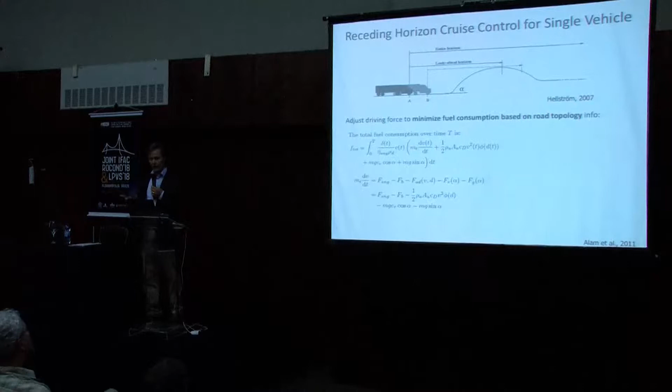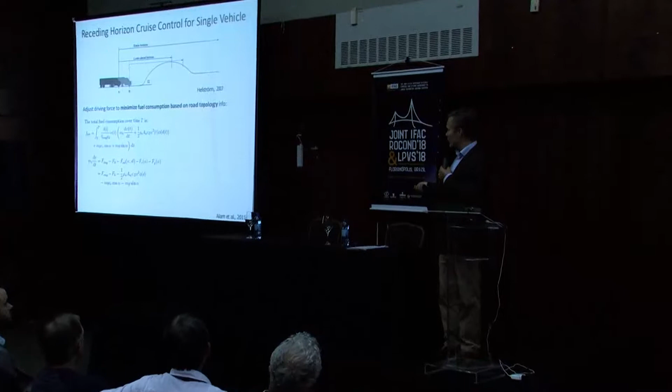And then we have two other parts which depend on the road grade. The interesting thing here is the second part, where you see it depends on the gravity and the road grade. So what makes this problem interesting is that for a truck, if we're going on a flat road, the dominating term acting against us will be the air drag. But if we're going uphill, suddenly the gravity is the main part. So we get an optimal control problem where there is a shift, so to say, between these two terms.

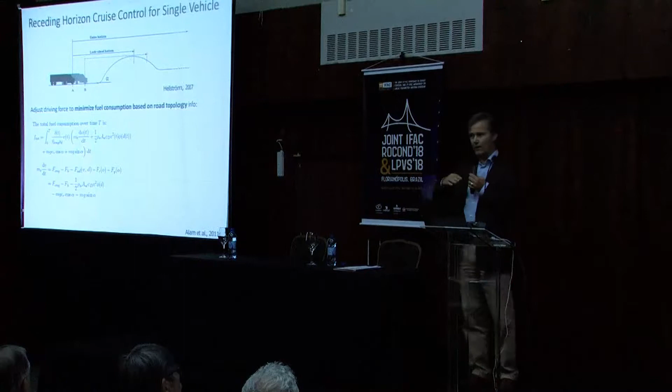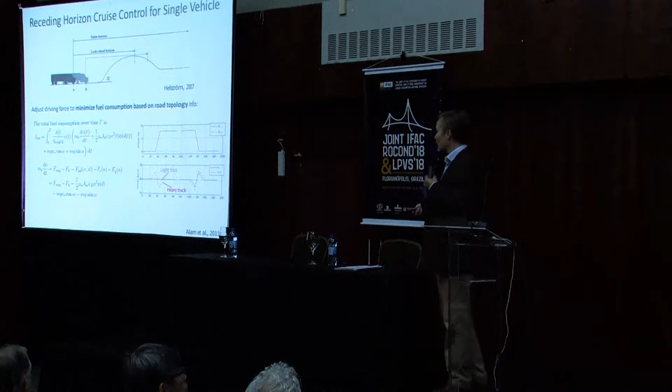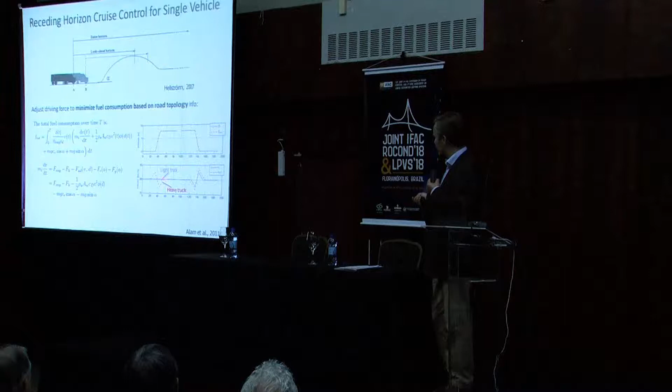So if we now take our favorite methods and solve this, we get solutions which are very reasonable. I illustrate them here. You see a hill going up and going down. If we have a heavy truck, like the red one, you see that the optimal thing is to speed up a little bit before the hill, and then let the velocity go down, and vice versa before the downhill. So it's very intuitive, but of course now we can calculate this automatically. And this is what is implemented today.

So typically the cruise controllers do something like this. And it's not very complicated to implement, right? It's just like an outer loop setting the desired velocity. This is how it's implemented.

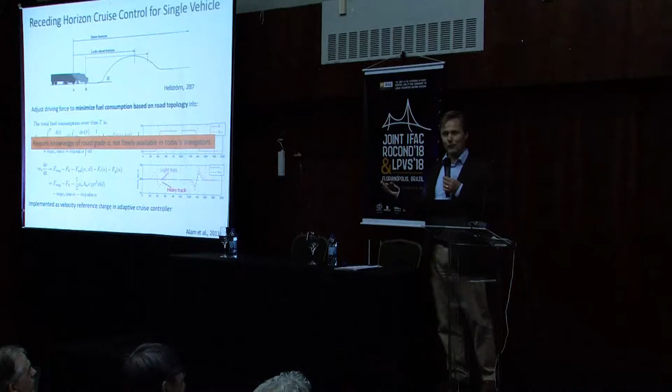The challenge, if you would like to do this in your own car, is that you probably cannot, for one simple reason: you don't have information about alpha. You don't know the road grade. Google Maps or Apple Maps or whatever you use don't tell you that, because you don't get that information out of the satellite data. The simple reason is that the Earth is flat, as you all know, from the viewpoint of the satellite. So you don't get good information about the altitude.

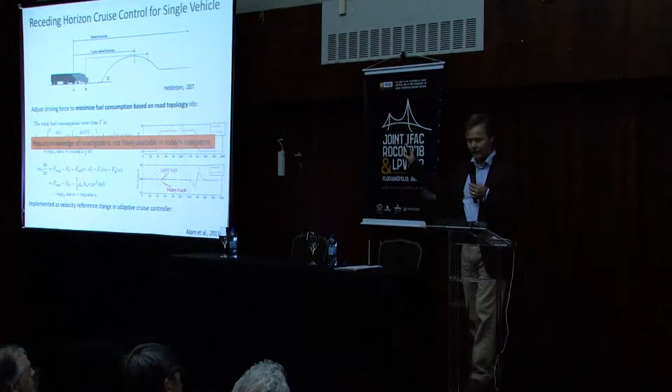So what do you do instead? You can do like Google and others do: you travel around the world with cars and measure this, and then you sell it. They don't sell it to us, they sell it to the big automotive companies and so on. But I won't dig into that more. In the future, I'm sure it will be available to all of us.

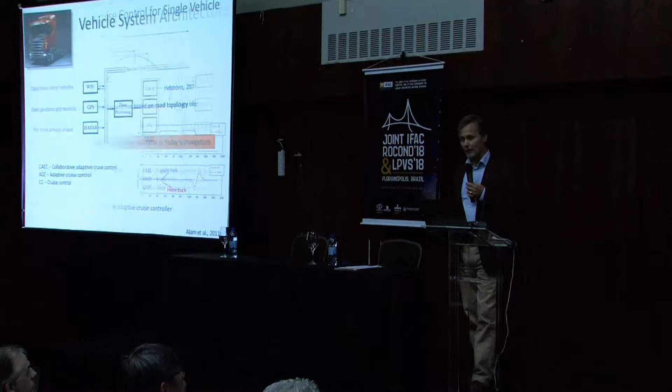Okay, so this was the cruise controller and how we can optimize it. If we look at the control architecture inside the vehicle, what does it look like? On the left side you have the sensors, in the middle the controllers, and on the right side the actuators. Sensor information is information from other vehicles, GPS, and so on.

Here I have the different cruise controllers. And what I activate is, of course, I set the reference speed to the engine management system, but I also need to regulate braking and gear shift. So I have three different types of actuators here.

I put this picture up just to indicate one thing when we start talking about platooning. When I develop my platooning controller, sometimes called CACC, Collaborative Adaptive Cruise Control, there's no change to the architecture or really the system. It's just another piece of code that sits here, and the driver is in charge. The driver could decide to switch it on or not. So from an implementation viewpoint, this is very nice, because it doesn't change much in the overall system. It's not like changing everything on the highway and so on.

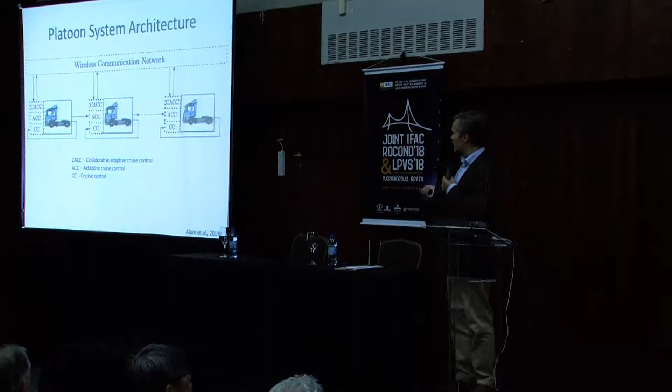When we have this in place in one vehicle, we go to many vehicles and have a whole platoon. Information between vehicles is basically communicated in two different ways: you have radar in front of the vehicles, which measures the distance to the vehicle ahead, and you have communication between the vehicles. The communication typically today uses Wi-Fi, 802.11p, a different variation than you have in your laptop.

It works terribly, but anyhow, that's what has been standardized and is being used in tests and so on. I hope it will be different in the future. I hope more control people will be involved in deciding how this type of protocol has to work, because we are closing the loop here. We are forming a network control system, which is different than just broadcasting alarm signals or so. Okay, so this is basically how the platoon system works.

Let's go a little bit into control now. Let me talk about that fundamental problem: how should we regulate the distance between the vehicles in these platoons? That problem has been studied for more than 50 years. Of course, we want to do this distributed, because the platoon might be long, so you only want to use local information for this.

Many of us involved in this know the notion of string stability, which is famous, introduced by Hedrick and many others. It basically means that if you have a disturbance happening for the first vehicle, that disturbance could propagate and even grow as we go along the platoon. So we can get phenomena like you see here, which is very bad. That problem has been studied for a long time.

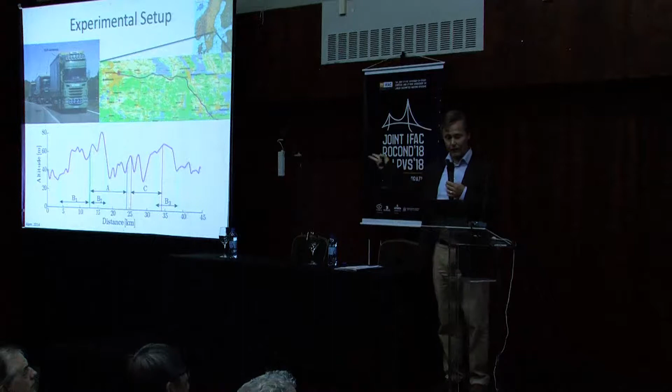Let's look at how such a system works in experiments. These are experiments we did a few years back with a distributed controller, very similar to what is in the literature, regulating a platoon of 3 vehicles. We went out on a highway west of Stockholm, 45 kilometers, going back and forth, for 3 weeks, with professional drivers of course—I don't even have a truck driver license. But anyhow, we were collecting information. So how did this work?

When my student at the time, Assad Alam, came back from this experiment, he was terrified. He collected all the data and summed up all the fuel savings that the platooning vehicles made, and he got a negative number out. This was just a few months before he was supposed to defend his PhD thesis, and he said, I cannot defend my thesis—I've shown that platooning consumed more energy than it saved.

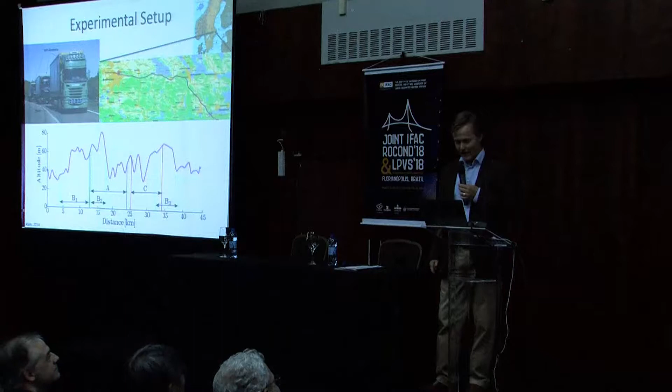The advisor came with very good advice and said, let's wait a second. Let's look at the data first before we just sum everything up. And we did that. I will give you a snapshot of what can happen here.

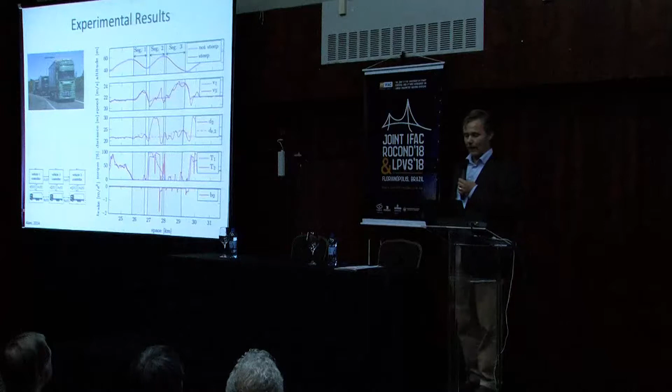Let's look at a short segment—just a few kilometers of that road. On top here, we have the road altitude going up and down. Here is the velocity of the first and second vehicle of the platoon, the distance between them, the torque generated by the engines of the first and second vehicle, and the braking of the second vehicle.

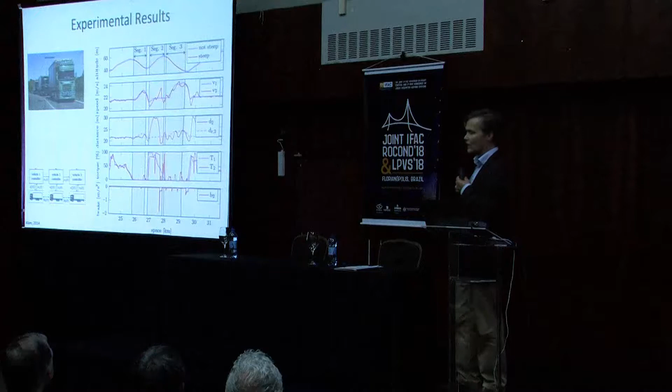You see here, if you look at how the first vehicle, the blue one, is acting—reasonable, right? We are going downhill here, and the speed of the first vehicle goes up, and then it goes down here, and so on. But you don't have to be a professor in control to see that this is a fairly bad control system.

If you look at the second downhill, for instance, you see that for the second vehicle, the velocity starts to oscillate, and the distance between the vehicles starts to oscillate. And the worst thing, if we want to save fuel, happens in the bottom plot—you see that we have to brake, not to run into the vehicle ahead. And if we are braking, we are just wasting that energy. So this is bad.

So, if you wonder what happened with this student—when we removed the segments where his system didn't act well, the results were pretty fine. There was a saving of 7-8% or so in general, and he graduated, and he's now head of a department at Scania, and happy about it.

But after we had this result, we started to think about whether there was something fundamentally wrong. Was it just a tuning issue with these controllers, or is there something fundamentally problematic if we think about regulating the platoon in this way, with only a distributed controller in this classical type of approach?

We thought there might be two things at play here. One is topography variation—could it be that all the theory, and also the few experiments done in Nevada and similar places where you don't see that many hills compared to Sweden, missed something? So this was one thing: how does topography variation influence us?

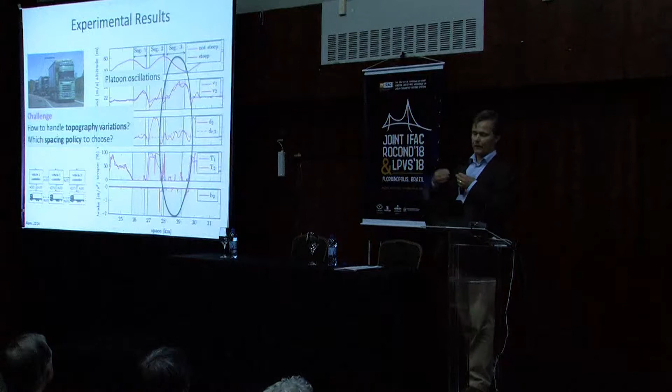The other thing was, how should we regulate the spacing? Typically you regulate the distance between vehicles, but is there some other way of thinking about that? Together with Bart Besselink, who is an assistant professor now in Groningen but was a postdoc with me, we came up with the following idea, or way of seeing the problem.

Let's start with a cartoon before we get into some mathematics. Say I have a vehicle here, a truck, that drives on a flat road and then starts going uphill. The velocity is necessarily going to get a disturbance at this point, because we never know exactly where that point is.

So if we plot the velocity of this truck over time, we get something like a dip. And we can plot the same thing over space along the road, and we get a similar dip. The next thing we do is put a platoon there, and now regulate the distance, d, between the vehicles.

Let's say we have perfect controllers, so we're able to regulate them exactly to d. What happens if we run the same thing again in our heads? The first thing that happens is this vehicle has a disturbance, as I said. At that time, since the regulation of this distance and this distance is perfect, that disturbance is going to instantaneously propagate to these two vehicles.

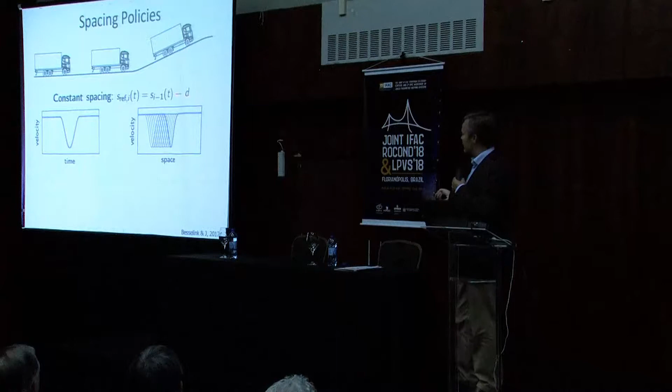So in time, we get the same disturbance happening instantaneously. If we do it in space, they are not at the same point in space, because these vehicles are here and here, so it will look like this. That's if we regulate on distance. We can now regulate on something else, something called headway, for instance, and we get different plots. We can also try to regulate on the time gap.

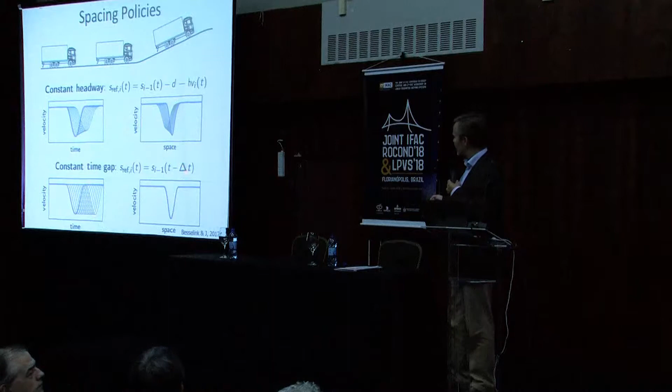Imagine we regulate on a variable I call delta t, which I can now try to dynamically set so that I get the completely opposite of the previous picture. What I can do is make sure delta t is such that in space, this disturbance is happening at exactly the same time. In that way, I avoid this propagation. I should have said that already.

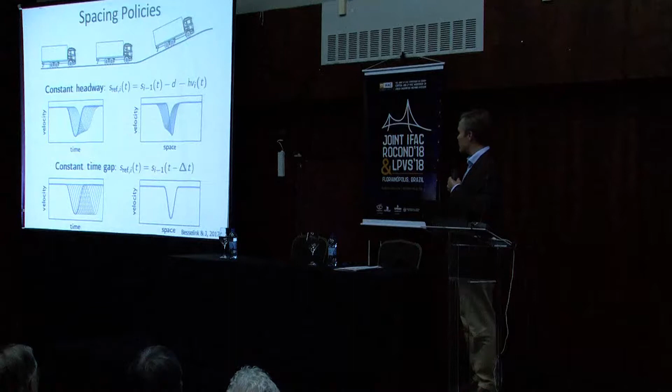Of course, next in time, this vehicle is going to be exposed to the same disturbance, and then this vehicle is going to be exposed to the same disturbance. So with this way of regulating it, I get a sequence of disturbances entering the platoon, and that's creating some of the problems you saw previously. This is not happening if we're now regulating on time in this way.

Is there some other consequence of that? Yes, the very nice thing from the control architecture viewpoint is that if you think about it, regulating on a time gap like this, making sure the distance between vehicles is just shifted in time, is equivalent to saying that the velocity for each vehicle should be the same in space. S here is the space variable.

So what does it mean? It means that if I give a velocity reference in space, all the vehicles in the platoon should just follow that as they go along the road. I can write this out and say my control objective splits into two objectives: each vehicle should stay with that reference velocity in space, and I should try to regulate the time gap between the vehicles. So a control architecture that looks something like you see in this picture.

We can also reason this is a good way to do it, for instance formulated in the framework of string stability. So we introduce something called disturbance string stability, which means we have a number of dynamical systems in a sequence like this. I call them xi, the state of each vehicle, and each vehicle depends on the state of the vehicle ahead of it and itself. Then I've added another variable, the disturbance variable.

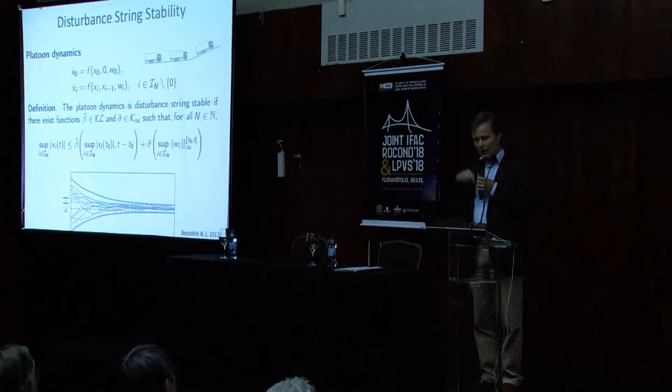And the first thing, of course, this is now a notion which I need the whole string of n vehicles to capture, right? I have to check all the vehicles. So can I go from this notion, checking all, to coming down to checking locally? And the answer is yes.

And this is what this theorem says here. So it's actually enough that if I check the state of each vehicle, here xi, and I compare that to the vehicle ahead and its own disturbance. So if I can bound that in such a way, then the whole system will be stable.

So the next question for us as control engineers is, of course, then can I find controllers that could do this? And you can probably find many different types of controllers that fulfill this. I will just show one that we developed here.

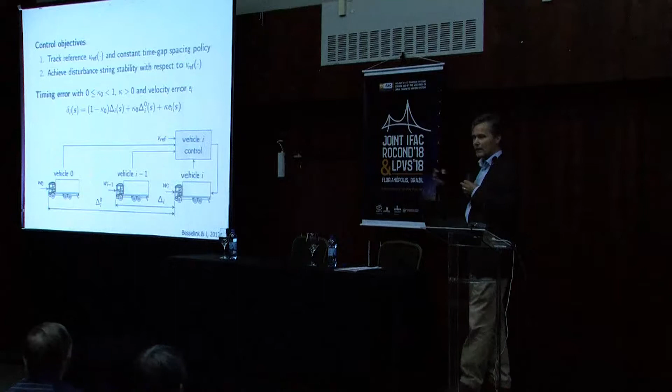So what we did was we introduced a variable which I call small delta, that captures both how well I'm regulating the distance to the vehicle, as well as how well I am close to the velocity reference. So if I'm able to make this small now, I would be able to capture these two quantities there.

And the nice thing now is that this actually works. So if I regulate this delta in each vehicle, so I'm regulating on this quantity, I will then be able to make the system stable in that sense that I introduce, given that this quantity will be kept small.

And notice that this is not, I'm sorry it says decentralized control - it's not really decentralized or completely distributed, right? I utilize some global information, and we know that this problem can probably not be solved without some notion of global state information.

But what is nice here is that it suggests that instead of sharing information and just arguing about how we share information on one graph, in this case a string, we have split this up into two layers and argue that certain information should actually be propagated in this direction also, not just in this direction. And if we translate that insight into the experiment I showed before, notice here.

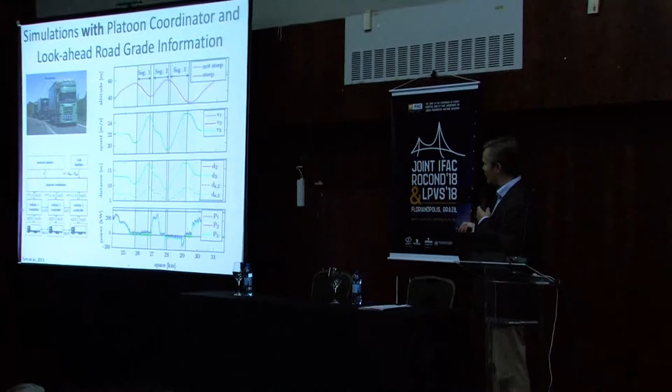If you look at the bottom left here in this architecture, you see that I have added some more blocks. In particular, in addition to the vehicle controller that resides in each vehicle and regulates the velocity of the vehicle, I have added something I call a platoon coordinator, a road database, and a mission planner here. So what is the essential here?

I have actually added two important things that change the control problem completely. I say that I have available road grade information, and that information comes from somewhere and feeds into that platoon coordinator. And then the platoon coordinator does exactly what you have seen on the previous slide.

So the platoon coordinator now computes reference velocity in space, and they should be the same, right? So they send it down to all the individual controllers. And then each of the controllers just regulates like you have seen previously.

And in this situation now, with the same data as previously, you see we are able to solve the problem fairly nicely, right? So in this case, all the vehicles should follow the same velocity trajectory. And you see they do that over space again, not over time, of course.

These are simulations. It's hi-fi simulations done at the automotive company Scania that we work with. So it's a very detailed simulation, but I want to emphasize the previous thing were real experiments. We are not yet able to run this in real experiments. Maybe next ROCOND or whatever, LPVS.

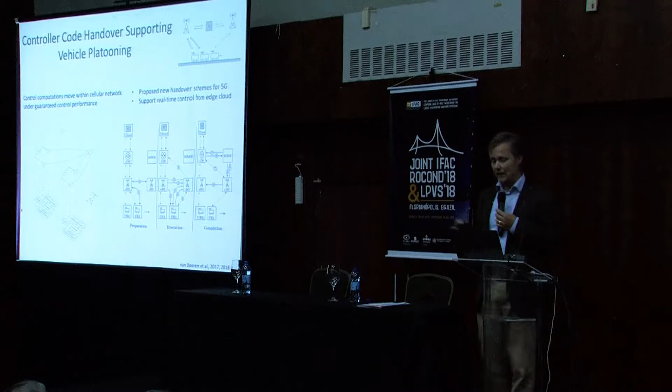This is somehow illustrated here. I won't go into more detail, but I think it's a fantastic possibility to think about future infrastructure-type control and what is required from the infrastructure to do real-time control of such systems.

Let's go on to the second piece here. They are not all equal in size and time, so don't worry, I'm not completely off. Let's go back to platooning and the platoon formation I talked about earlier.

What do I mean by platoon formation? I mean automatically having vehicles form platoons on highways. The principle is very simple: vehicles come from different sources, different roads onto the highway, and then merge on that highway.

The solution here is mathematically very similar to what you saw previously. You solve an optimal control problem and find a reference velocity that you suggest to the different platoons that are to merge. The control system is a little different now.

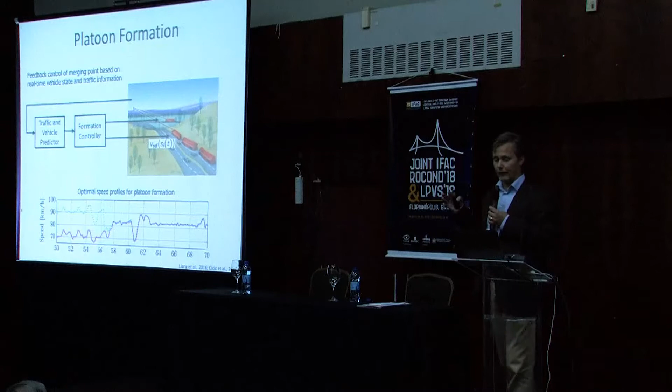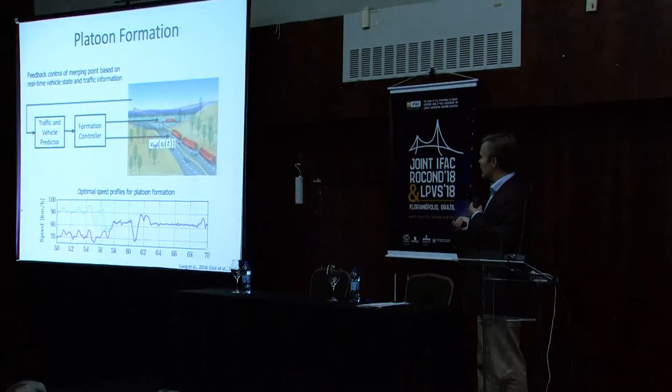Why? Because the information we get is not only from the vehicles, but we also need information about the traffic. That information goes into a predictor and then a controller that generates the control signals being communicated. I won't talk more about the details, but I'll show some experiments we've been doing on this.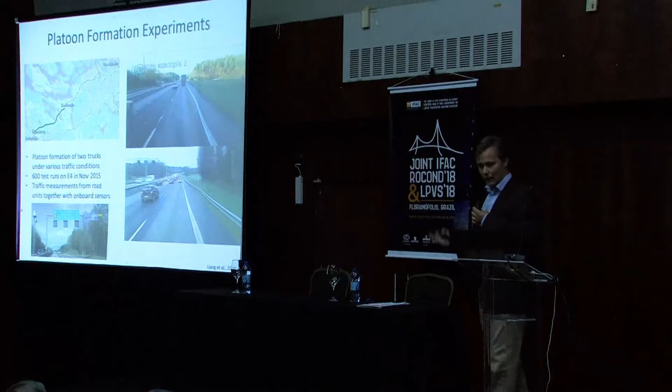So now we are back in Stockholm, on another highway than last time. We are going along a stretch about 10 kilometers south of Stockholm. On this highway you see now and then that we pass these gates.

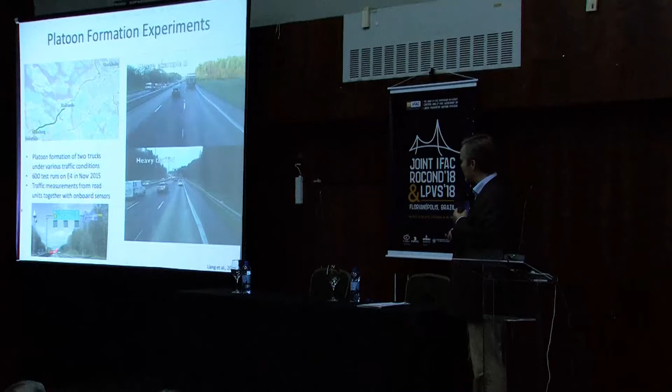There's one, in the picture down left. You see there's a gate here, and this gate measures the density and flow of vehicles in each lane. This information we can gather, and we did that.

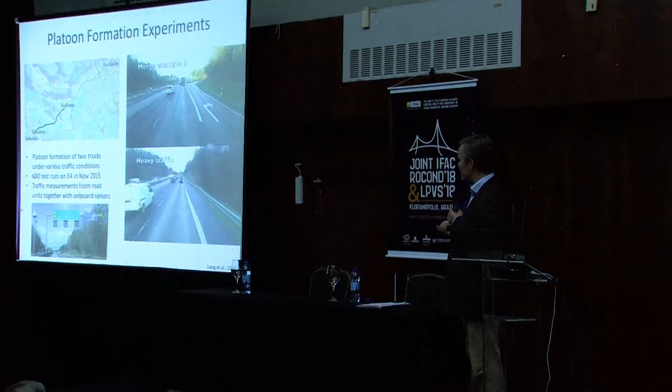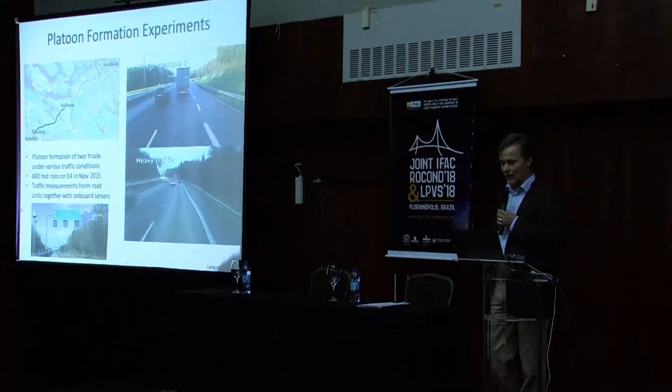What did we do here, what do you see in the videos? We are sitting in a second truck, trying to merge with the first truck. We did this over and over again for a few weeks, 600 tests - morning, no traffic, early 5 o'clock, during rush hour, and so on - just to see how this works and to understand what we can do about it.

One thing you can do once you've run these tests is take measurements from all the gates and plot them on what traffic theorists call the fundamental diagram - a relation on a highway between traffic density and flow. You see it has a fairly nice linear regime, which we know is typical.

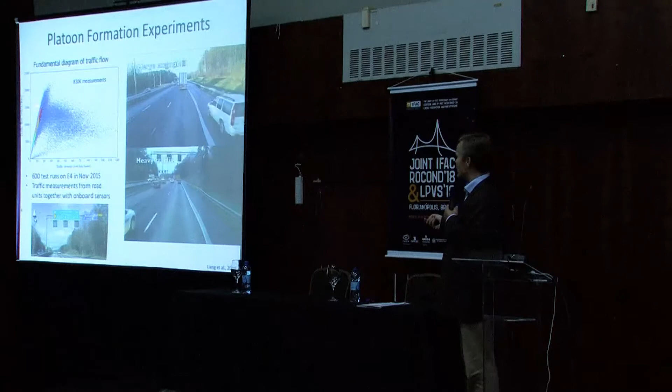If we have congestion, we would be all over in this diagram. But with this type of information, we can utilize it for predicting when we will be able to platoon among these vehicles. Perhaps in heavy traffic we will platoon or merge a little later than in light traffic. So you can use this information in real time to do this type of prediction.

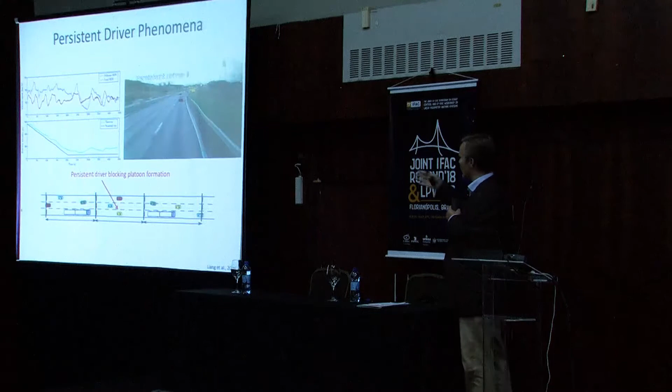You can also use this information and these videos to see interesting phenomena. What you see here happens now and then. There's a little red car there, and the driver of that red vehicle is not like all the other drivers. In Sweden, on the highway, cars go 110 kilometers per hour while trucks go 85. So this guy is not supposed to stay there, he's supposed to pass. And if he stays, we cannot merge, we cannot form the platoon. This happens now and then. We call it the persistent driver phenomena.

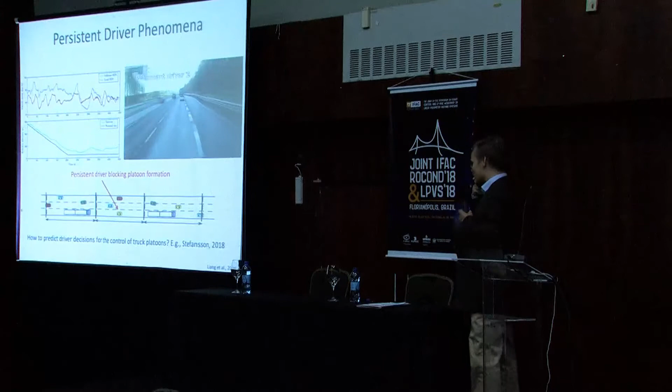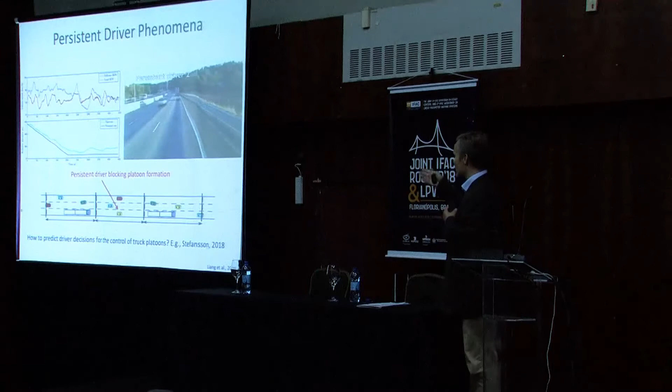I think it's interesting enough, and since we talk sometimes about cyber-physical human systems, we've actually been using that as an example to develop some models, and we also started working with some neuro clinic people to try to understand human behavior in various types of situations like this one. You can say, how should you be able to predict humans?

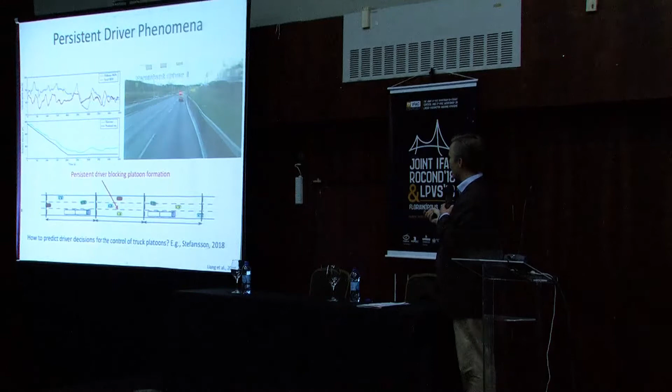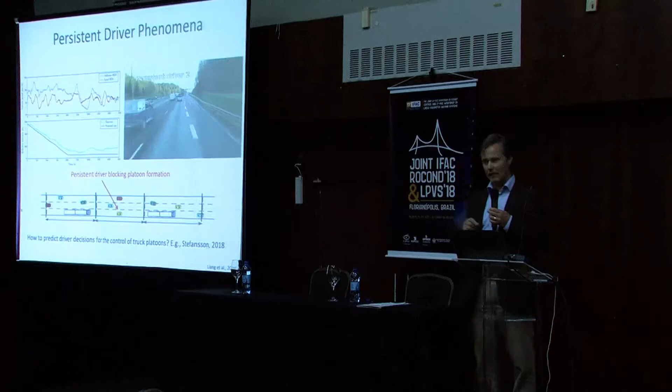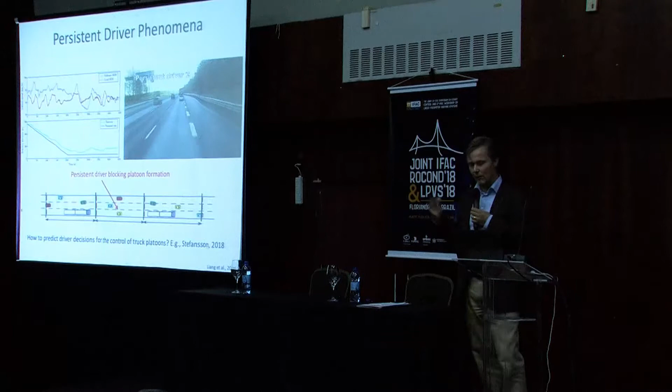But notice that in this situation there is a very tight interaction between the human and the traffic. What happens here is there is a heavy flow of vehicles. If there is no flow of vehicles, you would imagine that if the density is sufficiently low, probably that driver would make another decision than staying. So there is an interaction between the physical state of the system and what the human decides to do. I think there are things that maybe one could improve in how these systems work today.

Let's go to something else. Another thing we started recently to get interested in is how does truck platooning influence traffic? I talked about wanting to do platooning because it benefits the trucks. But could we also say something about what the influence would be? Yes, we can do some of that, and I don't have time to go into much detail.

As an electrical engineer, you could think there is a filtering going on here. The trucks are going slower, they don't change their velocity very much. It's a bit like a low-pass filter into traffic, which might vary much more, and there we have these phantom waves and so on building up. So there could be something here, and this will give you an appetite on what one can do.

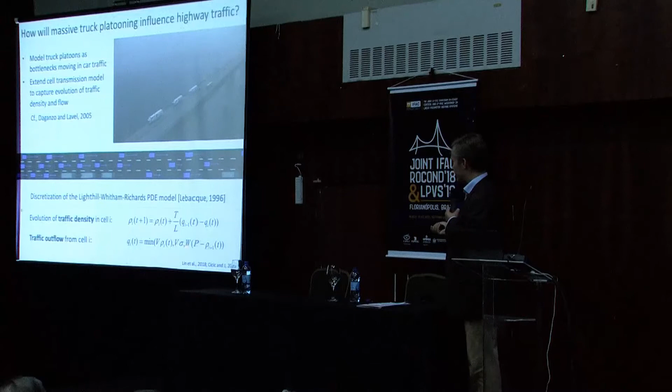One type of model one can develop here is based on classical traffic theory, where you try to model the density and flow of vehicles. There are different models here. One very famous model is the cell transmission model, developed by Daganzo back in the 90s and studied by many people. In this model, we can introduce the concepts of platoon and see how they influence traffic, giving you difference equations on how the density evolves.

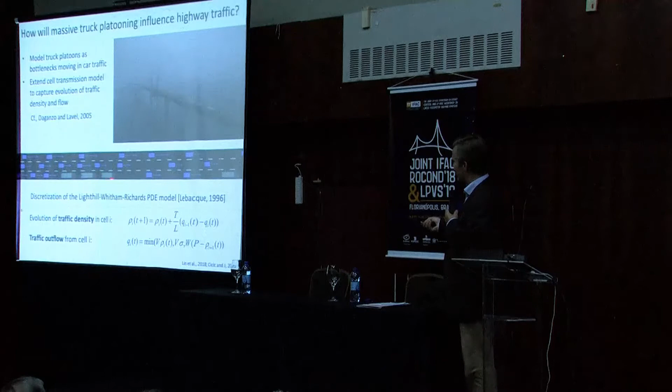Notice here that the platoon acts somehow like a bottleneck. If the platoon were standing still, the truck basically cuts off one lane, and there are only two lanes here, so the capacity of the highway reduces. But the trucks are not standing still, they are moving, so it's called a moving bottleneck. You have a dynamic phenomenon happening in the interaction between these two concepts.

Now one can think about controlling slightly the velocity of these platoons. That will affect the dynamic phenomena of the rest of the cars too. So you can control some components here.

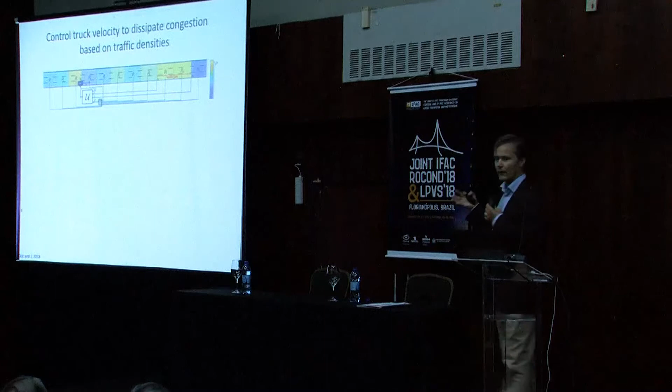So what could this look like in a picture? Basically, we have segments of a highway, and given the sensors I showed you before, we can know the density in these segments. The lighter color here means higher density. Imagine I could regulate one vehicle, or one platoon, here. Based on this information, I can try to improve the traffic congestion. Of course, I cannot solve it completely, because the congestion is there because the capacity is not high enough.

What we can see is things like you see in this plot. Here I have the road, the distance along the road, 0, 5, 10 kilometers, and time on the y-axis. The color here is a density, just like up here. So you see that at 10 kilometers, for instance, you see that I have different densities over time. I can now follow a single vehicle here, like the red one.

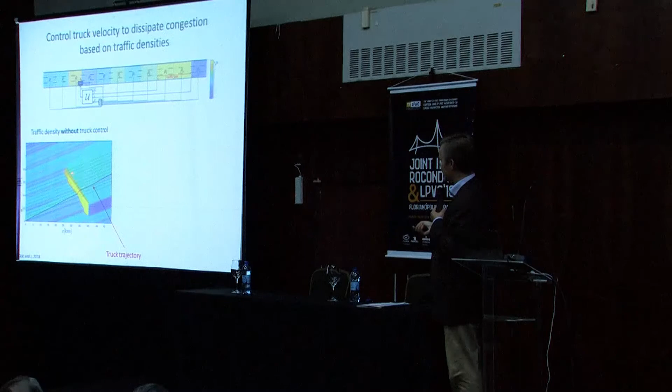I start here at 0, and then I follow more or less the flow that I have. And over here I have a congested area. The congestion started at lower time right here, and then it propagates forward in time but backward in space. So this is a very common phenomenon that you see in traffic, right?

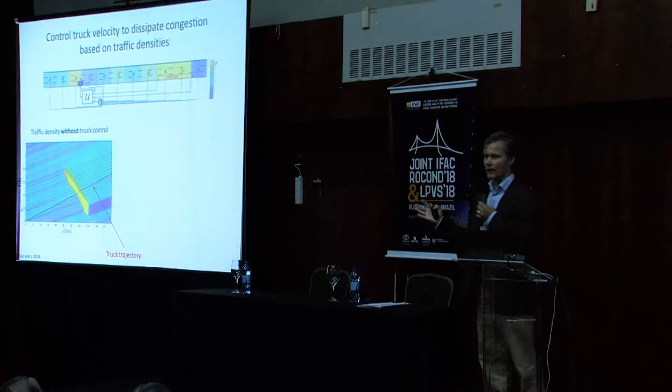So let's say that we can now control that vehicle or that platoon. What can I achieve then? Then I can achieve this. So now I let that vehicle go a little bit slower, you see here, that's why it has a higher derivative in this plot. What is the consequence? You see that this yellow area is gone now.

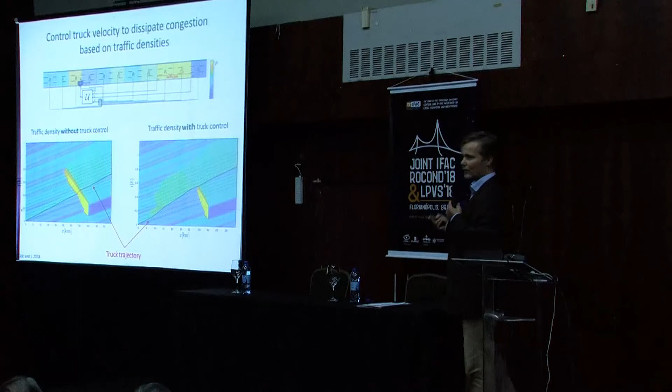But there is no free lunch, so what has happened instead? I have a little bit more congestion here instead. But from a traffic viewpoint, it might be better to get rid of the yellow area, where there is more or less a stop in the traffic, and drive a little bit slower before than having that. So this opened up this type of possibility to do this type of control, which I think is a very exciting control problem, and we are just at the very start of this problem.

I see that I'm starting to run out of time now, so I don't have much time to talk about the last layer here, but let me mention the problem that we have there. We call it the platoon matching problem. It's an optimization problem where, when we know where vehicles are going, we would like to match them as they go along here, so that they platoon as much as possible.

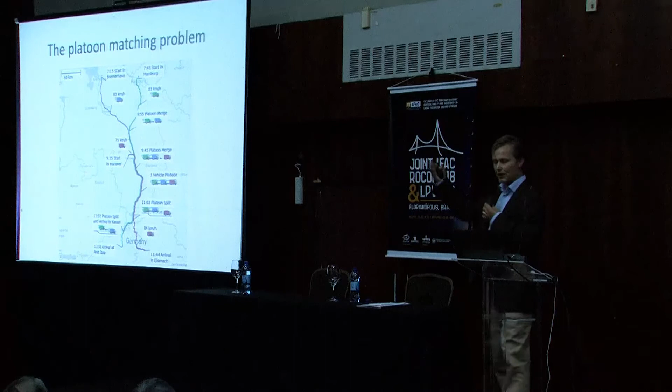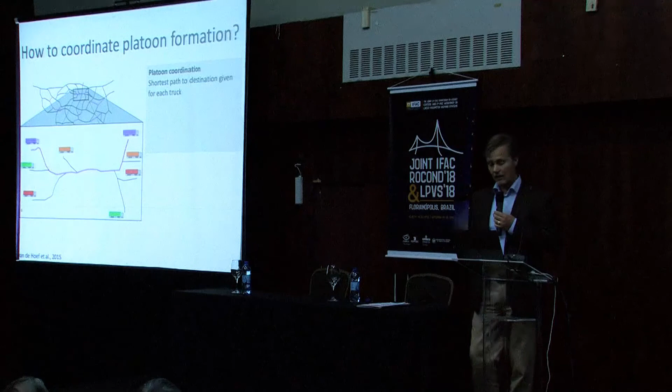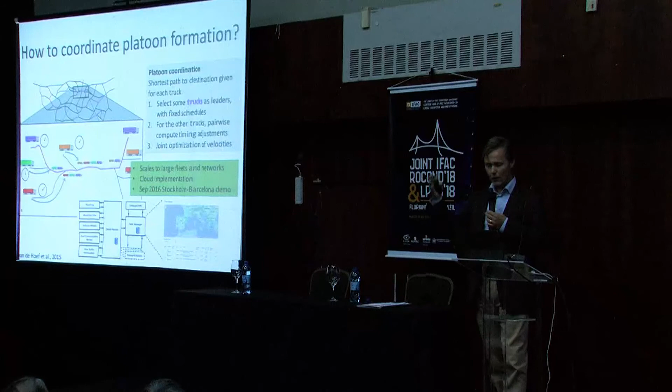This can be solved, for instance, locally by looking at individual vehicles, where they're intending to go because it's their shortest and most efficient route, and then we try to maximize the amount of platooning by changing the velocity a little bit or changing the departure time a little bit. This we have also implemented and done experimentally. We were running over Europe from Sweden to Spain with these vehicles and tested it and so on. There are nice mathematical problems here which are open.

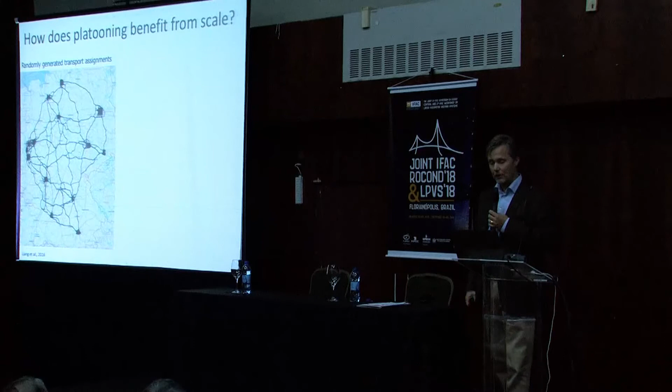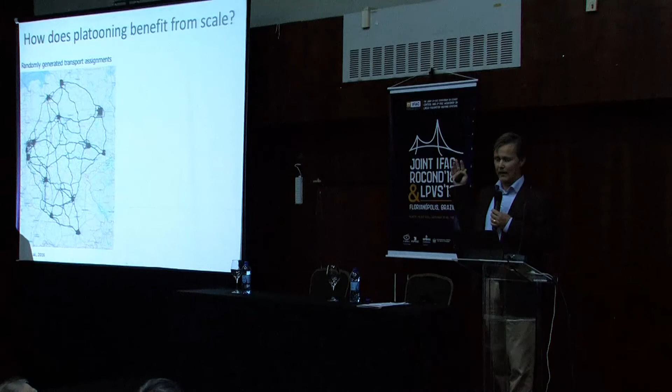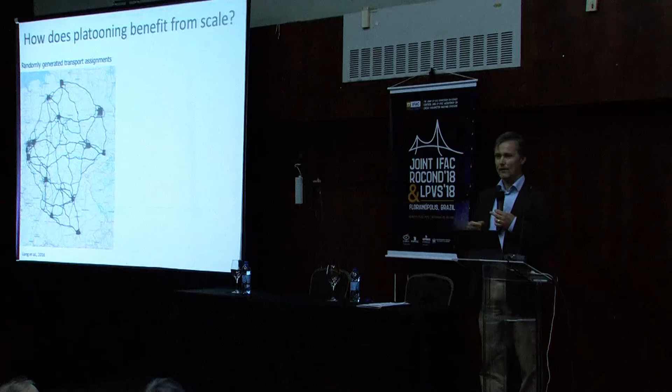If we ask ourselves how many of the vehicles need to have this technology in order for it to work, what does that have to do with mathematics? Think about that we have this graph again. Basically, if we are a vehicle there, we should be close to another vehicle so that we could speed up a little bit or slow down so that we could platoon. So how close and how many do we have to have there?

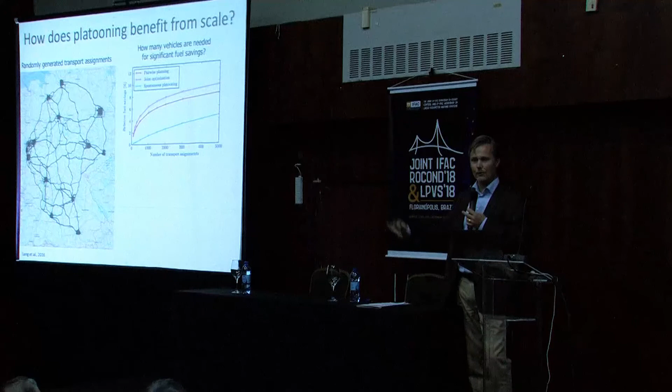Just to give you a number here, if we look over Germany again, it's actually enough to have just a few thousand vehicles in order to save up to this maximum 10-12% of fuel. If you remember my very beginning of the talk, I said that there were 400,000 vehicles in Germany, so it means that we only need a penetration rate of 1%. 1% of the vehicles need to have this in order for us to actually start saving quite a bit of fuel. So with that, I would like to draw some conclusions, just summarize.

I talked about this 3-layer control architecture and some problems that we have on the different layers, and I talked about this string stability, controlling these vehicles over the infrastructure.

I hope that the chairman allows me to take some questions. If you don't have any questions, I have 3 suggestions of questions there, which I didn't have time to talk about. One thing is, who should pay and what should you pay in this part? Should the driver who drives in the first vehicle get paid? Should there be a service that society provides, and so on?

There are many interesting questions. It's not just we who are doing this. We have just started a new project in Europe where all the European truck manufacturers are participating, where we want to do platooning now with vehicles from different manufacturers. So multi-brand platooning, which I think no one has done so far.